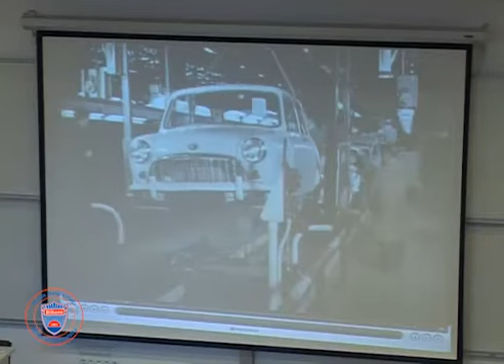In the old days, they just used to make cars and sell them afterwards. These days, car makers like BMW make their cars to order. In other words, they don't make a car unless someone's ordered it. Orders are placed at dealers all over the world. Once they've been processed, they come here, up to 1,000 a day, and they're all different.

There are 3 basic types: the Mini One, the Mini Cooper, and the Cooper S. But there's literally thousands of different variations. That's why every Mini made in this plant is made to order, and every order has to be right. That's where production planning comes in.

Okay, I think it's a good way to stop here. So we're talking about mini automobiles, which have the shape you're probably familiar with. And it is known that they have different colors, and it's particular about the automobile that we're talking about.

If you remember in one of the previous videos, when they were showing history, there was a line of automobiles sitting there. That's an assembly line, where at each step of the assembly line, they place another part onto the skeleton of the automobile. So at the end of the line, the automobile is almost ready to go. This is the idea of the assembly line. Most of these ideas are based on Henry Ford's innovation in the beginning of the 20th century. There have been a lot of changes in the last 100 years, but the idea is simply a flow line.

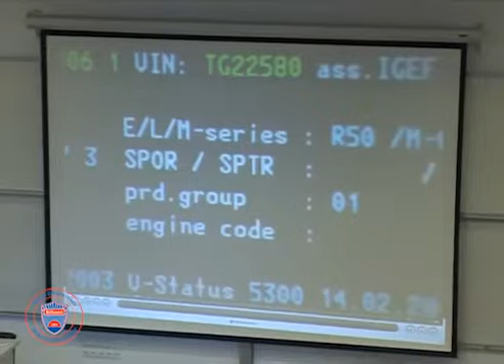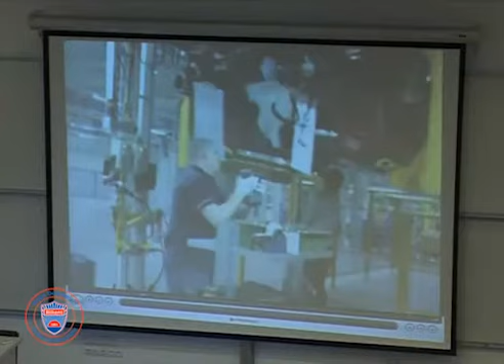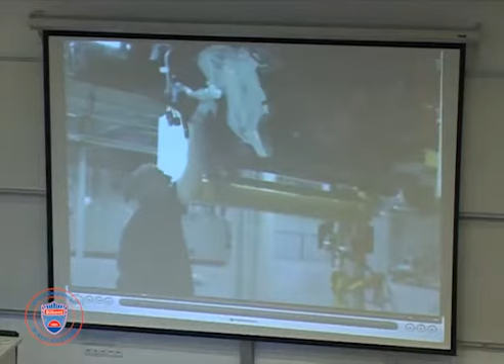BMW uses a special program for this called KISS. Sounds nice and friendly, doesn't it? The KISS system is based on barcoding, like the barcodes you get in shops. Each car is given one of those, and it can be scanned at any time. This means it can be tracked through the factory, and it can be checked to make sure it's the right type, the right colour, and so on. So that's how they plan things.

How do they make them then? This is where the basic framework of the car is put together.

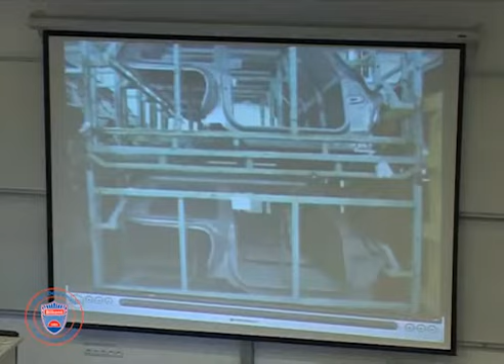So we are entering the actual factory now. It was the planning department before. The basic panels are made in Swindon and Solihull. They're sent into what's called body in white area, where they're put together.

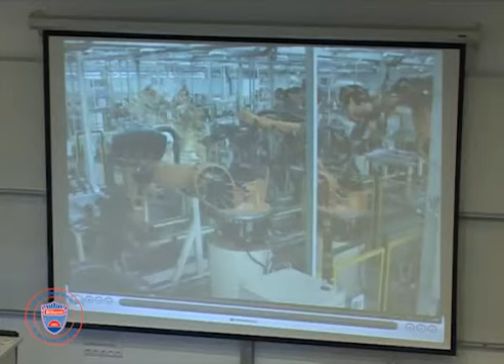Why robots? There are 228 robots here. They do welding, they put glue on, they can measure and control parts exactly. They don't get tired and they don't take tea breaks. They do get dirty from time to time, which is where, check this out, they clean themselves. Now, is that cool or spooky? I don't know.

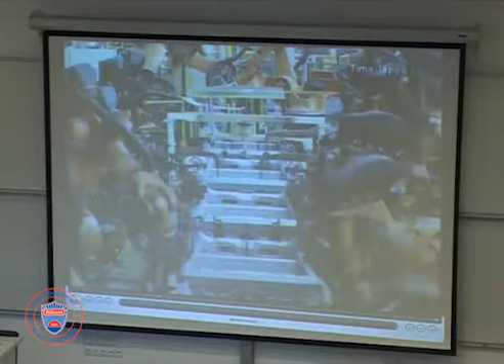It takes about 6 hours to put the basic shell together. It's made up of 350 panels held together by 4,500 spot welds. This is the underframe assembly. After that, they put all the other bits on.

Okay. Now, the first group of operations that we have seen are about shaping the body. So they call it white because it's basically colorless in the beginning. They are going to paint according to the demand. But they are simply, the first part that we have seen is a group of operations which are instrumental to set up the body of the automobile.

Now, you can see that with the process charts that we already know, you can actually write the operation of each robot one by one. Am I right? They are not doing necessarily the same thing. And so we can actually write all the operations of the robot. Now, up to this point, we thought that only humans were what we cover in process charts. No. Of course, you can do the same thing for the robot.

Go take this part, weld this, and put the bolt over there, take the nut out, and so on and so forth. So you can see that actually doing this requires a lot of prior knowledge of what's going on, processes, so on and so forth. And those processes, partly you are going to learn that in some courses that you are going to see in the second year. So the idea is that we already are aware that if we had the technical background, we can formalize all the information which is given at this part.

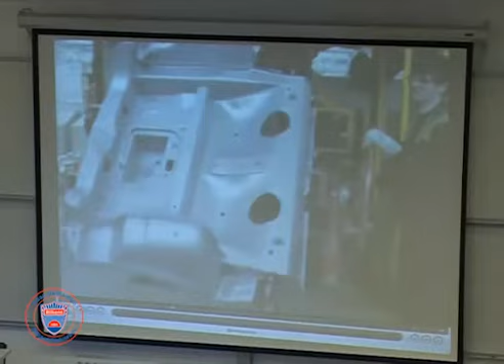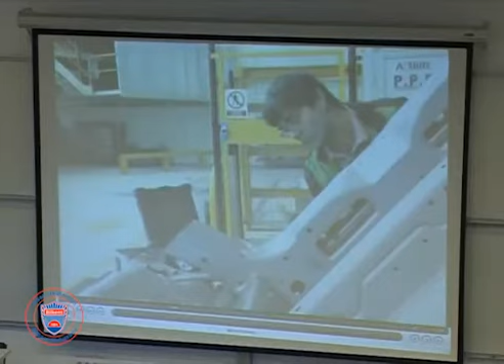No, definitely not. So how many times do you test? We continuously test these spot welds throughout the day. What, every single one? We test every single weld, not all at the same time, but as the car moves through the production line, we test different welds at different times, and throughout the production shift, we test all of the spots.

And there's another kind of test they do in body in white, which is to test the geometry of the car - in other words, to test it's exactly the right size and shape. We use a series of lasers that reflect off the body, and we measure to within half a 100th of a millimetre the precision, the accuracy of the body.

Oh, that's scarily technical, what do you mean by that? Well, basically, it's half the width of a human hair. We make sure all the parts are aligned in the right orientation, in space, relative to one another, and then we weld them together. Why is it so important? It's important because when we send our body shell to the trim and final assembly building, they need to fit their components to the Mini - the seats, the cockpit, the steering wheel, for example. And it's got to fit completely. Exactly - if it's the wrong size and shape, those parts won't fit. Oh, really? Mad.

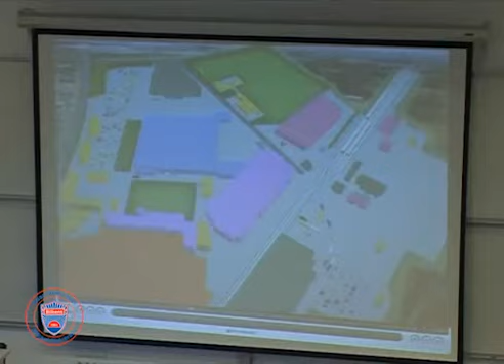Okay, quality control is an essential part of manufacturing. What they're actually doing in quality control is making sure that the welds they've done, and the drills they've made for later use, are in the correct location.

Now, of course, you can say robots are not going to make mistakes - they are not like humans. Well, it turns out that mistakes are also made by robots, because robots have to center themselves in order to take certain measurements. Humans do the same thing - you use a ruler, but robots aren't able to read a ruler.

So what they do is position themselves at a certain point, and given that coordinate, they do the welding accordingly. They select a point, say, Y 25 centimeters away and X 10 centimeters away - that's the location where they're going to work. Of course, they sometimes misposition themselves - robots, although they seem very sturdy, do make mistakes. So the only way to catch these mistakes is to make quality control. Now, of course, I think, if I'm not mistaken, they don't control 100% of every body they manufacture.

Because basically you can take a sample rather than doing it one by one, and statistically you can show that you are doing a very good business.

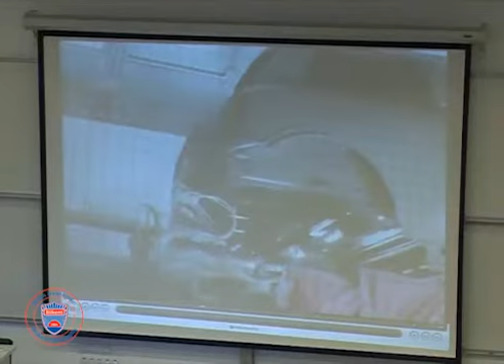But you can't just slap the paint on. There's all sorts of other stuff they do. They seal the joints. They put on something called surfacer. The underbody gets a special protective coat. Only then do they put the body colour on.

They put a clear glass coat over that. And then, finally, cavity wax.

And you can have the roof in a separate colour if you like. I think Mini's the only car that has a separate coloured roof. It really goes back to the Mini Cooper days when John Cooper was racing Minis and had the roof painted special. You can see it on the Monte Carlo or the Italian Job. The Mini Coopers have always had a coloured roof, and we've carried on in that tradition.

But it's quite a complicated process. We mask up the entire outside of the car, leaving the roof separate, then have 4 robots that paint the car either black or white, and then have to take all the masking paper off. So it's a very intensive process from a manpower point of view.

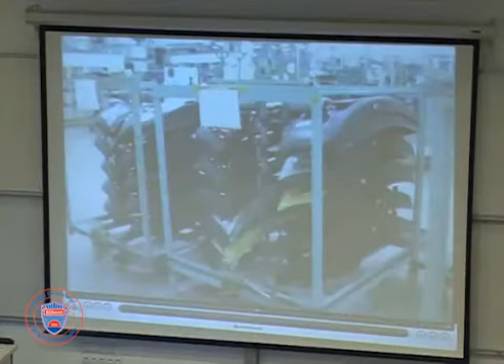Over 200 different suppliers are used in the production of the Mini, only about half of those are in Britain. The engines are made in Brazil, the tyres come from Europe. They're part of globalisation. Well, this is it.

But it's no good ordering loads of parts and hoping for the best. Order too few, you run out, you can't make any Minis. Order too many, you're wasting money on stuff you don't need. So they use a system called just-in-time.

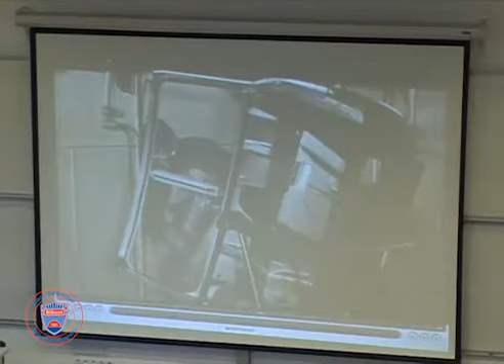So Rachel, could you describe what just-in-time is? Just-in-time works by letting a supplier know which parts we need to build the next car that we're going to build. We send them a sequence, and the material arrives just in time to build the car. Before just-in-time came in, manufacturers would have to guess how many parts they needed and store them until they needed them, but it was inefficient, it wasted money and space.

If we didn't have just-in-time, there's a possibility the warehouse wouldn't be big enough. All of the material would be here, we would waste our money on that material, and it could also lead to health and safety problems.

Is just-in-time linked to the KISS production system? Yes, it is. The KISS production system takes the customer orders and turns them into a material planning schedule. We therefore get the material from the suppliers and it arrives here in the warehouse just in time. A good example of JIT is in the cockpit bases.

The suppliers in Redditch are given just 6 hours notice before the bases are needed on the production line. It's not very long though, is it? No, it's not. The suppliers are on a constant transport loop and they're continually building cockpits. As soon as those cockpits are ready, they put them on a vehicle at Redditch and they're shipped down to us and received directly to the manufacturing facility. The KISS system controls what parts are needed when, and they're transported into final assembly via these tunnels.

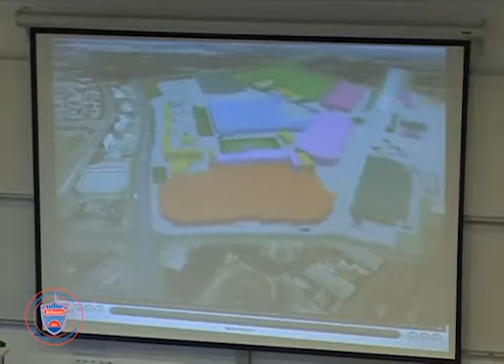That warehouse you see is not different from the warehouse of a supermarket. In a supermarket, individuals go and buy the items, whereas here a production order comes and somebody picks up certain items to take to production, to the final assembly. The arrival of customers is better known here, whereas in a supermarket it's less known. But the storage space allocation, the way you plan the storage space, is exactly the same as a supermarket. So we're talking about a manufacturing system, but there is a supermarket within it that fulfills certain requirements. In a supermarket you also have goods coming from overseas, imports and so on, and here it's exactly the same. Only the customers are not very well observed here - they are simply numbers. A certain number comes, and so you fetch the parts required for that customer.

Red roof or a different type of wheels, different carburetor, and so on - you may order different things, so it will be placed according to your wishes. It's like a supermarket cart where you place the items you want to buy, but you are not there - that's the main difference. Your number is there, and your number is collected accordingly when your time comes.

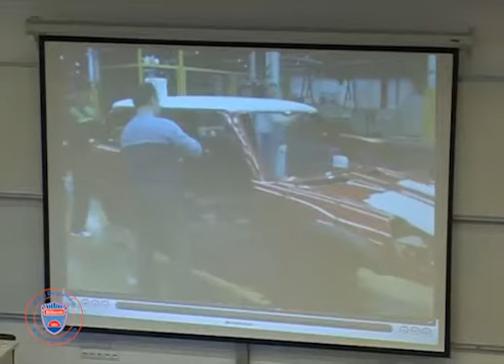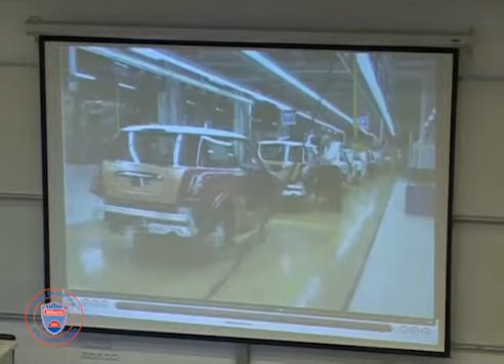So this is the final assembly line that I was talking about, and this is where all the customer choice elements start to show up - the colour combinations, choice of wheels, sunroof, left-hand drive, right-hand drive, and so on.

That goes on there, like so. I can't afford a Mini, but I'm contributing to a Mini. I'll never buy that car - it's worth a fortune.

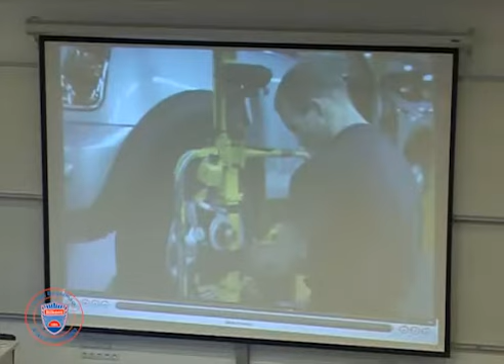Of course, it's still linked to the KISS production planning system. Now there's a barcode which contains all the information for this particular car, linked to its original order, so you can check it's got all its bits. It's also a way of monitoring each car through the production process. The doors are, in fact, taken off and put back towards the end of the process - this makes assembly easier.

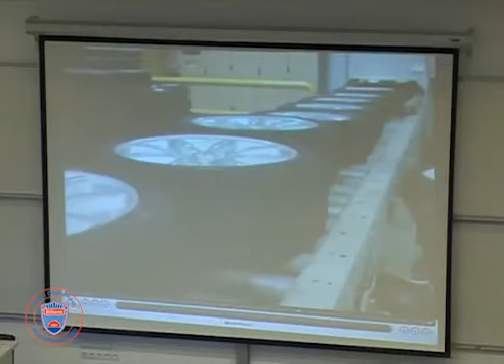There are so many different types of tyre you can have - it would be dead easy to put the wrong ones on the car. This is where the checking system comes in. So, what's your job here? When I do the wheels and tyres, I have to put the right tyres on the car. I need to set it to go on the track so they're in the right order to go on. You have to do the sequence - why do you have to do that? Well, because if it goes on wrong, you go over the check, it'll go down, and then they'll have to stop the line to get the right tyre for it.

Is this machine correct? Well, what it does is it'll come from here, and it'll take a picture of it.

The right tyre job - quality control is still vital. Just taking the car off the end of the track, and this is the deck sheet, this is what a customer orders, and anything on here I check to see it's on. Once I've done this, I'll then look around the car. This is called a sector audit - it's where they check that all the bits on the car are what the customer ordered. Every car we fit has got a number, and then I'll check this list: steering wheel, rear spoiler, check the rear spoiler, white one, white one. Once I've gone through this list, I'll check that I've fitted every label correct. So is that right? That's right, yeah.

In the past, assembly workers weren't encouraged to think about their jobs - they just came to work, did their bit, and went home again. These days, people work in teams. The idea is that workers manage their own work and solve their own problems as far as possible. Continuous improvement is another important thing - it's not enough to keep the same standards. How can things be improved? This is what this meeting's about.

One of the problems we highlighted was the amount of litter on the skillets going through glazing. In the space of approximately 24 hours we probably get one or two gauge trips just due to litter being on the skillet. So what we did yesterday was replicate the skillet transfer system we've got in drop section 7 into drop section 6. We put it in yesterday afternoon - this is in the past 24 hours.

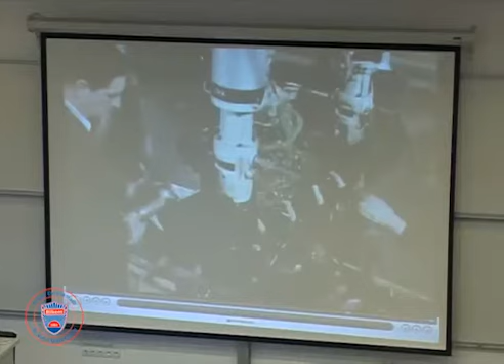Health and safety is very important. Certain areas require protective clothing and equipment. This is a legal requirement, as well as being a good thing to do. In the old days, the tools were mostly powered by compressed air, and it was much noisier. These days, it's mostly electronically operated tools, which are also more accurate.

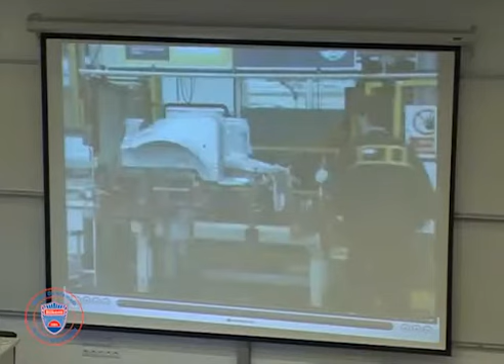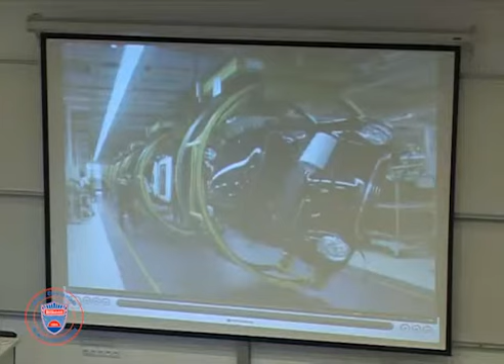The moving floor of the production line is deliberately flexible. This is less wearing on the knee joints. The factory is laid out to minimise the amount workers have to lift things. The height of the car on the assembly line can be altered. This minimises the amount of bending or stretching when parts are being fitted. The rotary sling actually turns the car around so that assembly workers can work easily on the inside.

So the Mini's pretty much finished by the time it comes off the line at final assembly. There's still a lot of last minute checks and tests to do.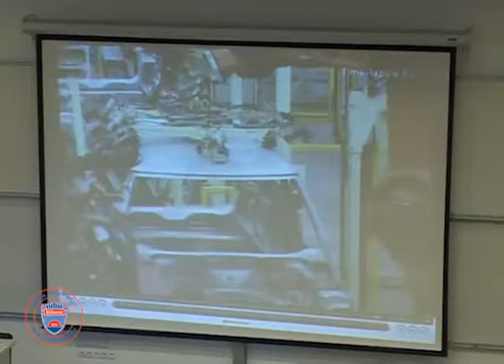Okay, I think this is sort of coming to the end. One note before we take a leave. Remember the health and safety - for example, they said you shouldn't be worried about lifting heavy things and so on. That's the role of traditional industrial engineers. Traditional industrial engineering in the 20th century did a lot of work on that. We don't have any traditional IE courses in our faculty anymore. I will talk about that.

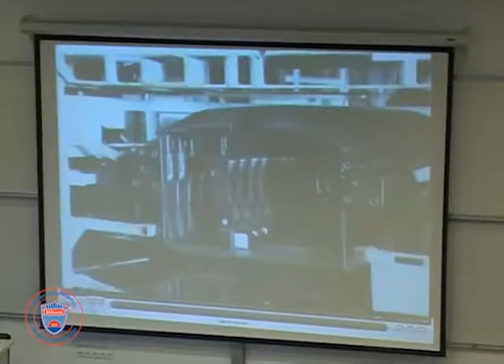Climate change is now officially recognised by the government, and it's caused by global warming. Cars are a big factor in that because of CO2 emissions. I mean, I love cars, but how many do we need?

Okay, I think the last part is important because it gives a global picture of automobiles. Now, we as engineers are interested in the details of it, but there are some other issues which we have to confront either in our daily lives or even at the workplace. Those are very important issues because you are not only going to become an engineer, but at the same time, we are hoping that you are going to become good citizens - citizens who are aware of these types of factors, which is a little bit beyond your own discipline. So there are certain courses that you will be allowed to take, and it will be in your curriculum as well, which is going to give an understanding of this global picture, although unfortunately engineering is more narrow when you look at that global picture.